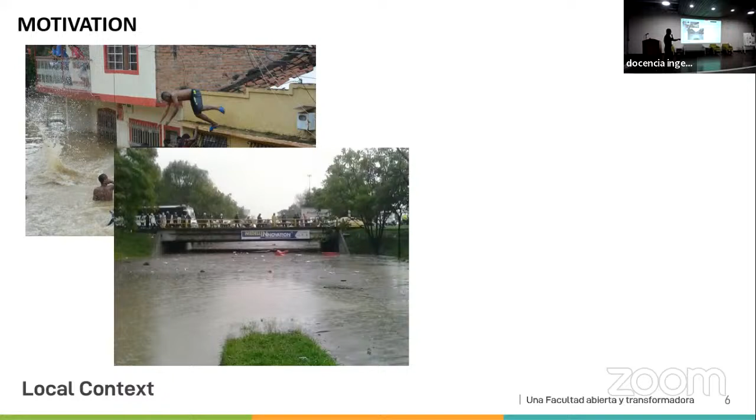This is called Medellin innovation. So the city that we call the most innovative city in the country is getting flooded every time we face a not that extreme rainfall. This is Bogota, our capital. This is Barranquilla, that is very famous for this kind of, we call it arroyos, like urban streams. They appear in a matter of minutes. They have been causing deaths and damaged property. And we see this every rainy season.

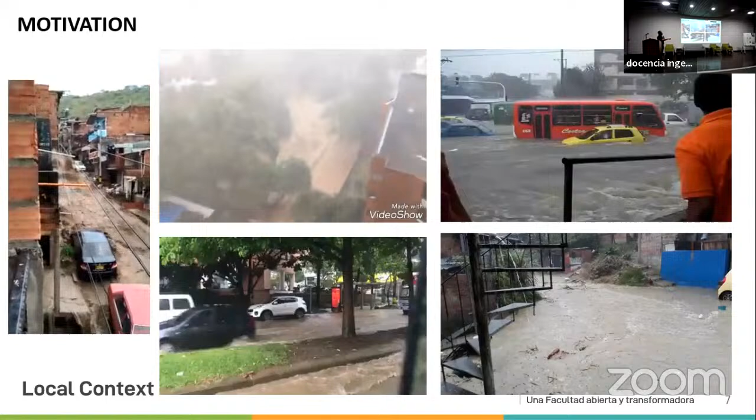But this water that is flowing from the upper part of the mountains gets into the flat parts, causing this kind of problems.

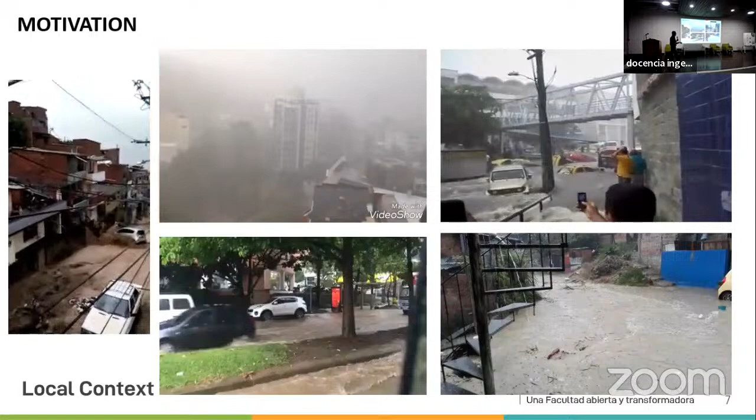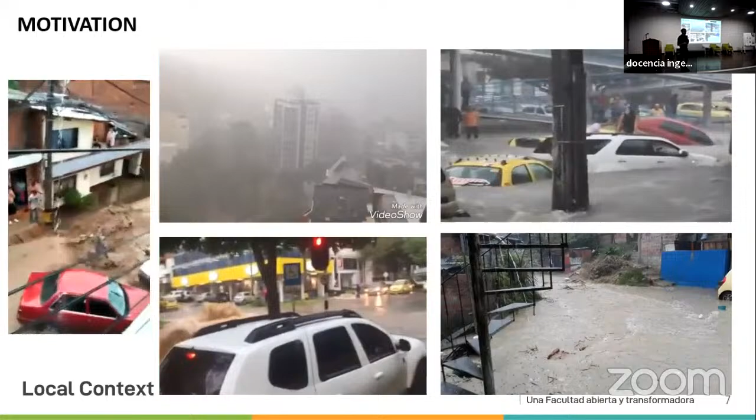And this is a combination of what we are building on top of our cities, but also a lack of capacity of the underground system that we have built. So we can see here on the manholes, the water overflowing. And this happens every time it rains. And again, I repeat, not a very extreme rainfall.

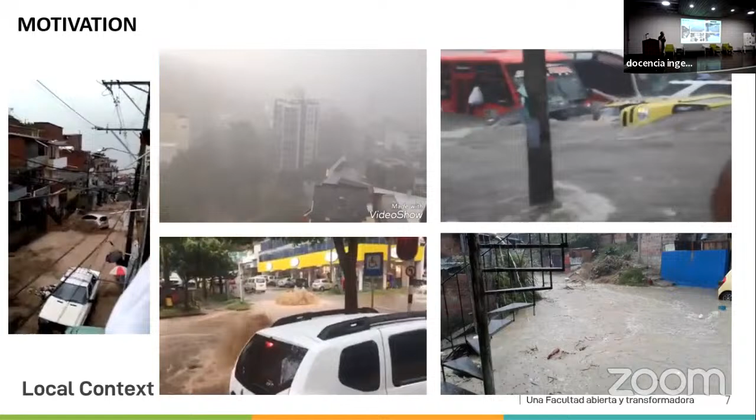This particular case, in this part, there is an underground stream. So it's not even a sewer system. And we cover it completely. And it dates back 50, 60 years. So the lack of urban planning is also exacerbating the urban flood problem. And I want to finish this motivation with this video.

And in this particular one, I want to show you another problem that we face in Colombia and developing countries that maybe you don't face in Germany: where we are building our houses. So we are not planning the territory. So I will wait a little bit. You see the house is completely flooded. You see what is the problem? Too much rain. You may think that, but in this particular case, there is an extra problem.

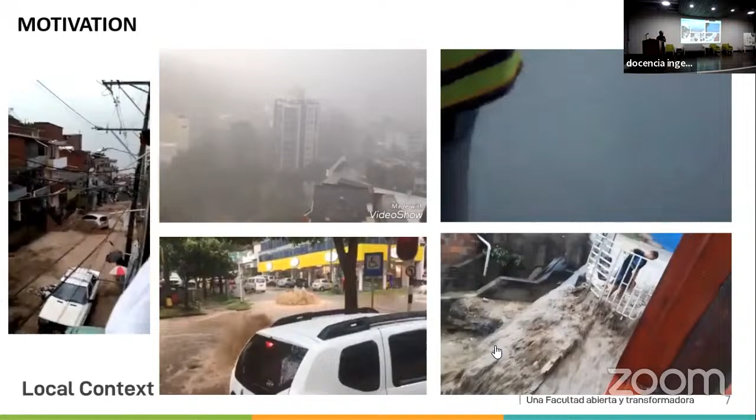We are building our houses next to the river. So we are not building with enough space from the stream. Again, this is a combination of several problems: more rainfall, poor planning. So my question here to you, and I don't have the answer, by the way, to all these questions that we are going to show you here.

Do you think these floods or disasters are happening more and more? Why? And we can start thinking, maybe it's because we have more social media or news coverage. We are more exposed to what is happening. Was this happening before, but we were not aware of it? Maybe. Is it the urban expansion, planified or not properly planified?

I think maybe. The more we build the urban spaces, the more impermeable surfaces we have. The more impermeable, more surface runoff. So where is that water going? To the streets and to the sewers. And if the sewers don't have the capacity of the streams, then we see more and more floods.

Is it climate change? It's one of the topics of the seminar, right? I don't know if you believe in it. I do believe in climate change, and we are living it. The rainfalls are becoming more extreme and more frequent. Places that were not flooded before are getting flooded now. So the distribution of masses of energy and water is changing.

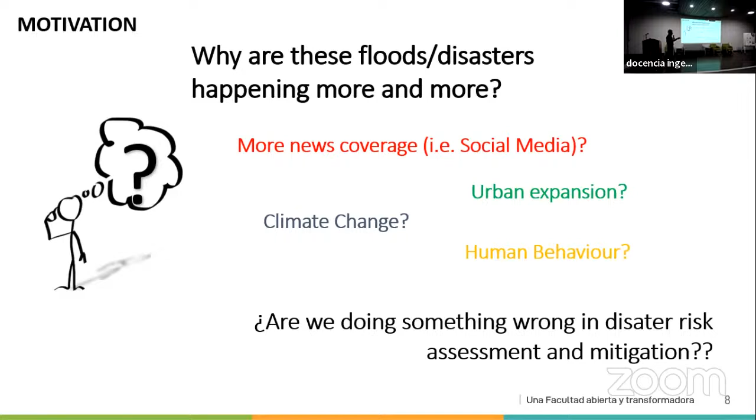Is it human behavior? We build where we are not supposed to build. Maybe we are taking actions in the wrong direction. Or maybe we are doing something wrong in the disaster risk assessment or the strategies we have to deal with this new paradigm. So based on these questions, I will show you why we are working on this topic.

And why in urban areas? As you may know, in 2020, more than half of the world population is now living in urban areas. So maybe the flooding is the same, but we have more people exposed. So that's why I choose to work in urban areas, because when we work with floods, we can also work in large scale flooding. But I think if we work in urban areas, we have a bigger impact in terms of the number of people we are helping. Maybe, I don't know, naive.

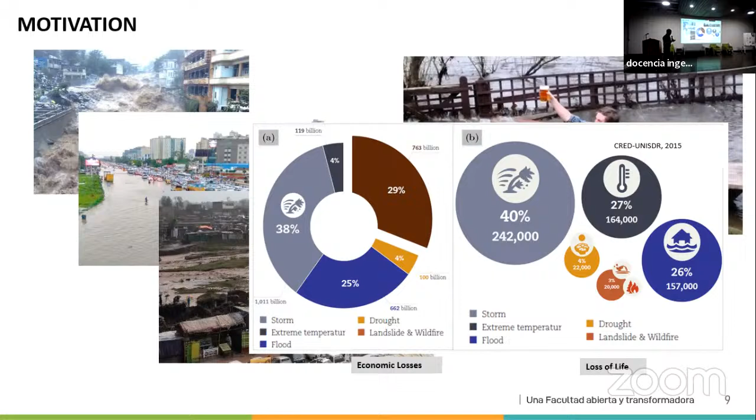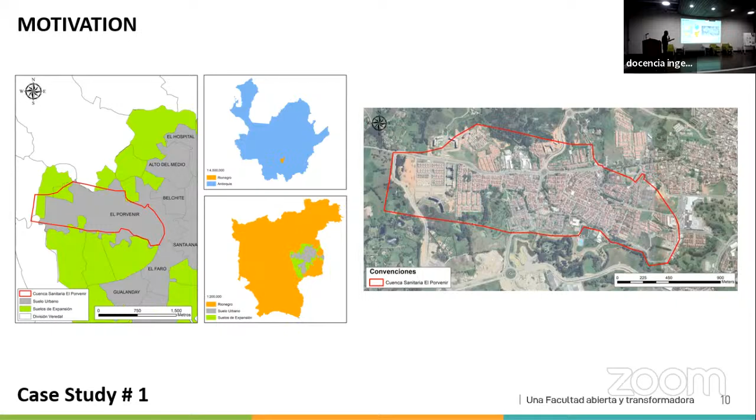And this part of Antioquia has been developing exponentially over the last two to three decades. So, first of all, flooding every time. When you see the news, you can see that that part of the city and others are getting flooded in every single rain, dating back from 2011, and in 2021, 10 years later, the same problems, or worse. So we are not doing anything to prevent this from happening.

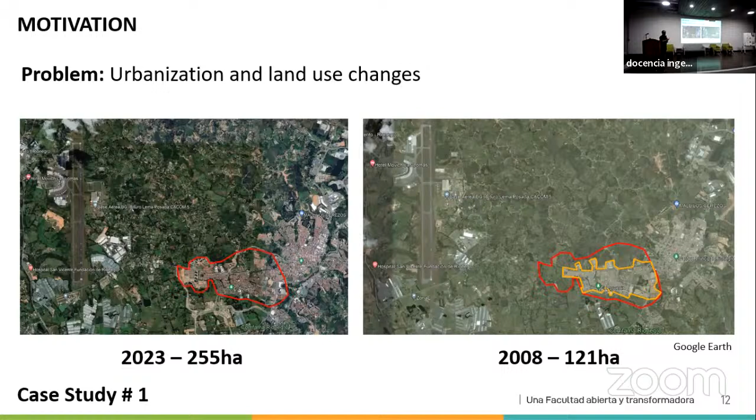So imagine you grow this big, but you don't build infrastructure to cover that extra water coming from more surface runoff. That only exacerbates the problem, and that's why we are still seeing floods. Plus, climate change, so it's raining more frequently and more intensely. So this is one of the things we need to cover right now when we talk about urban drainage and floods. What is going to happen?

So we need to plan the cities of the future accounting for what is going to happen to the climate, even though it's uncertain. If we don't plan accounting for climate change, any solution that we build will not be enough.

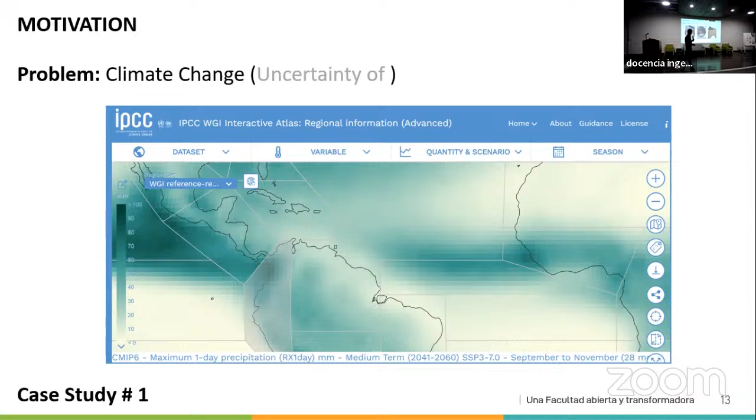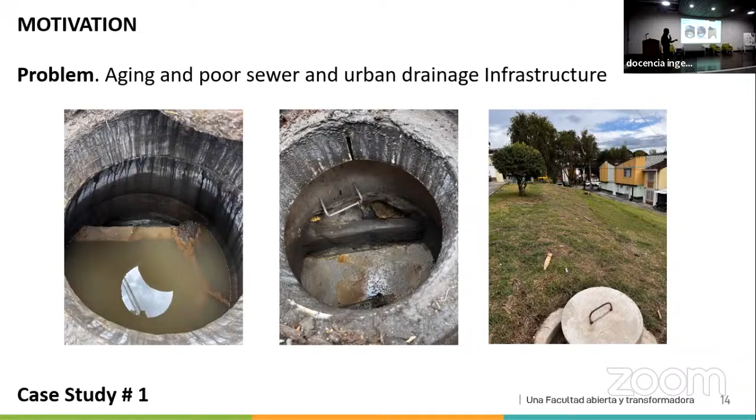And when we did the field survey, we found things like this. In normal operation, this is only sewer water. It's not raining at the moment. It's already collapsed because it was built 50 years ago. So what to do with these kinds of problems? If we put together urbanization and land use land cover changes, plus climate change, plus that aging infrastructure, we are only going to see and face more and more flooding. Based on that, we asked ourselves, okay, what to do?

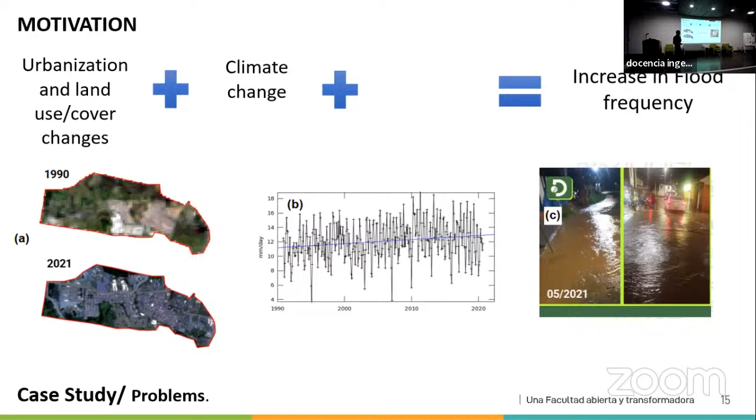This is the kind of flooding we are dealing with there. These images and videos are from around this part of the city. This is a very flat area, high water table, poor infiltration, poor sewer systems. That's the video of the flooded area.

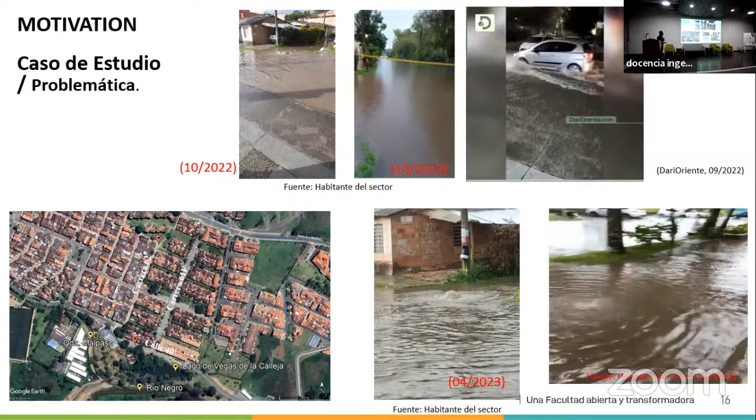So we wanted to propose how to reduce that flooding problem, but not in the conventional way, not just putting bigger and bigger pipes. We wanted to evaluate if nature-based solutions in the form of sustainable urban drainage systems can work in mitigating the impact of this flooding.

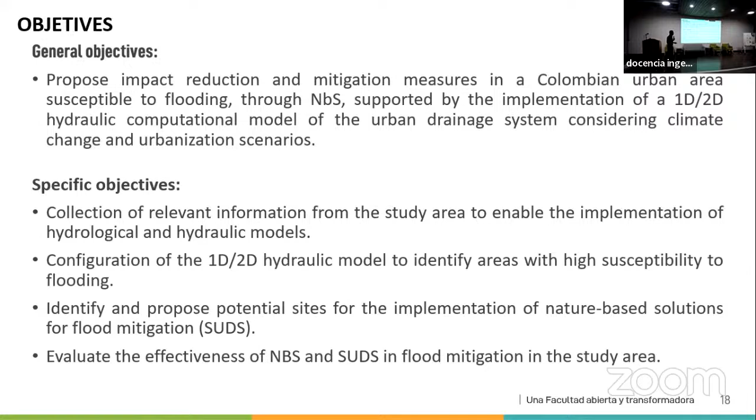Basically, what we did is build the hydraulic model: a 1D model in pipes and canals and a 2D model of what happens with the water when it goes onto the streets. Then we tested some potential sites to locate these sustainable urban drainage systems, and we checked whether we can reduce the flooding problem in the area. So basically, I'm okay with the time.

This is how our network looks. Another problem here is that our sewer system is most likely combined. So the same pipe is used to transport sewer water but also rainwater. So think what happens when that water goes to the streets and we see these guys swimming in that water.

And we found that in Rionegro. And not only there, everywhere we go in Colombia, we have that problem. I don't know how it is in Germany, but here that is a really, really big issue. We have to manage to get a really high resolution digital elevation model. This is really important to take proper decisions.

Imagine when the water goes to the streets and you cannot represent it very properly with the surface. So you don't know where the water is going to go if you don't have a really detailed one. In Colombia, this is not an easy thing to have. It's very expensive and not everybody is willing to pay for that.

Fortunately, we have the utility company there, which is also the one that works in Medellin, that has a very detailed one. It was 75 centimeters by 75 centimeters. So we properly managed to represent the streets. That is what channels the water that is flowing on the surface.

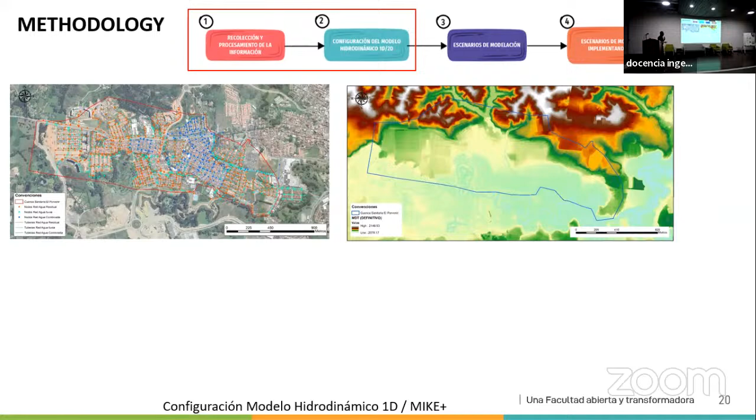We also did a classification of land use. This is how the municipality looks in a raster format with 7 classes. You see the roads, you see the buildings, you see the trees, grass. With this, we wanted to know how impermeable the surface was, to evaluate the potential of how much water of the rain will become runoff.

We did this with 3 satellite images from Google. That's the way that we need to do it, because the satellite images here are very expensive. So we try to lower the cost, and we managed to get a really decent approximation of the urban surface.

This work was expanded later, and I'm not showing it to you today, but we also managed to build a simulation model based on cellular automata to project how the city will look in 25 years. So we did a simulation. It's a software called Dinâmica EGO from Brazil.

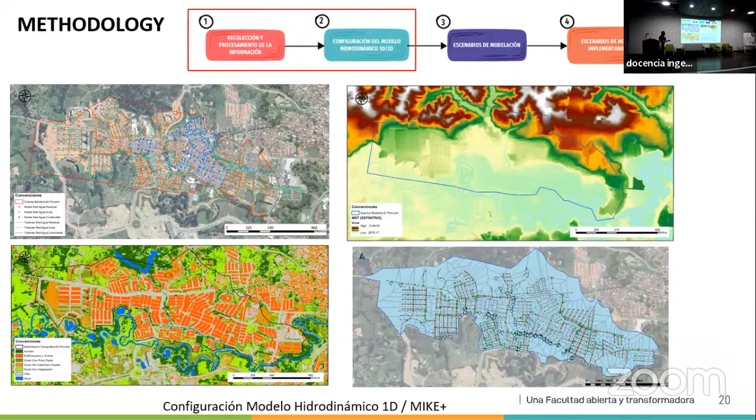And with 2 or 3 images that we get from Google Earth, we managed to simulate how the city will expand in 25 years. And if you know how the city will look in 25 years, maybe you can plan the infrastructure for that future. And then we built the models, 1D, 2D. This is how the 2D model looks. You see a lot of triangles. These are the kind of results we have.

And then we tested our models. Locally, when we were walking the study area, we found some videos of previous floods. So people showed us where the water elevation was, because unfortunately, we don't have many measurements in our systems. So if you want to know if these models are working properly, you need measurements.

Okay, my model says the water in this place will be 20 centimeters. But if I don't have enough information to prove it, to calibrate my model, I just have a very beautiful model, but I don't know if it's giving me the right answer or not. So the way that we calibrated was with these videos that we collected from the people. I remember those videos that were there.

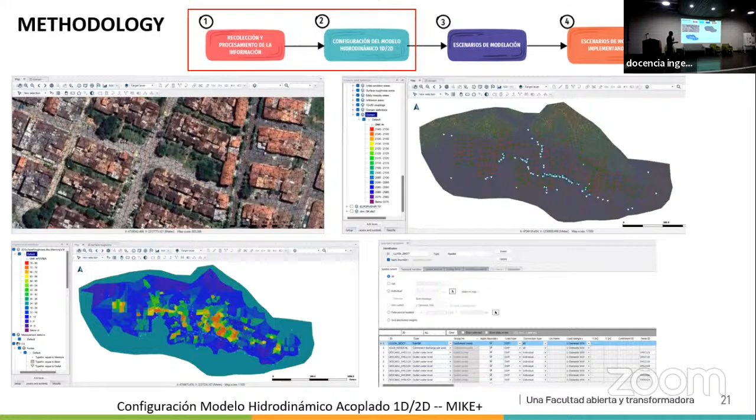So we walked the streets and we managed to ask people to tell us how deep the water was in a specific place. So the calibration that we did with our models was testing that our model gives us the right kind of elevation at certain points that we measured. So we were very confident that our model was simulating the rainfall-runoff part of the event.

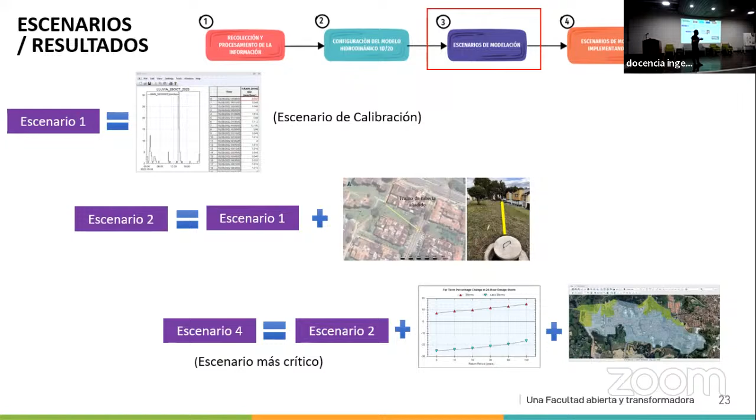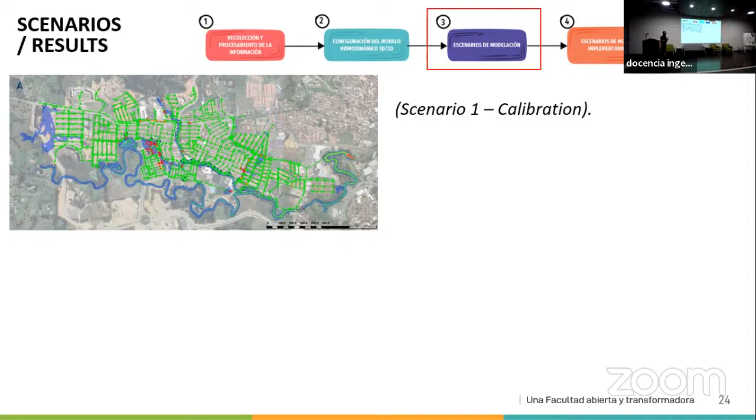And then we started testing for climate change. Okay, what happens if the rain is not this one, but 20% more, coming from climate change? And this is the kind of results we have. You can see here, if you see it in red, these are manholes that are overflowing. This is for the actual simulation, and this is for the future one with climate change.

You start seeing a more critical situation. You can see more flooding in this upper part. You can see that here that part is not flooded. So climate change is having an impact on our simulations. This is how the study area looks now. This is how it looks in the future. And you see that the water is almost double in both scenarios.

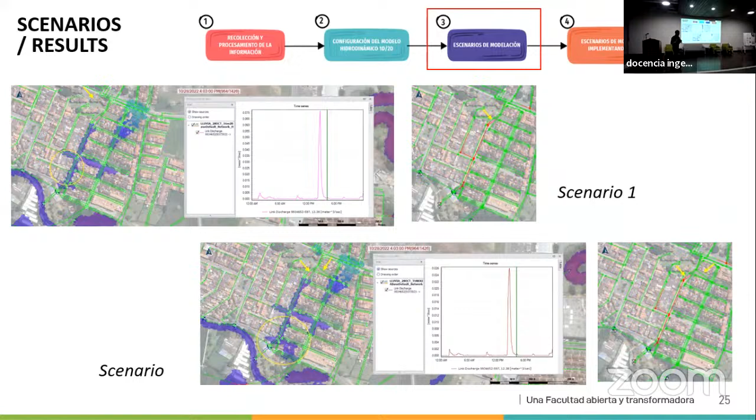So what to do with more water? We put bigger pipes? Maybe. That can be a solution. But we ask ourselves, is that sustainable in time? So we are going to start getting bigger and bigger and bigger. That needs to stop. For instance, I will use the case I know a lot, the Netherlands, the dikes. So they said, okay, let's go bigger, bigger. And at one point in time, they said, this cannot be sustainable. Let's build with nature. And that's where sustainable urban drainage comes around.

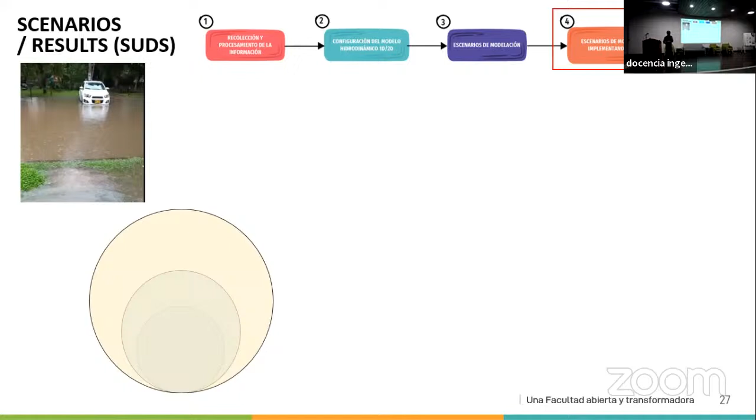So this is the question I'm asking. Shall we put in a bigger pipe? And if more water comes, a bigger one? Maybe they will take the whole street. Is that economically feasible? I think it's not. Or dikes, shall we increase the dike if the water is going up?

And if the water continues going up, shall we build a bigger dike? And in that area, we have dikes, by the way. There is a Rionegro River that is there. This is the image that is there.

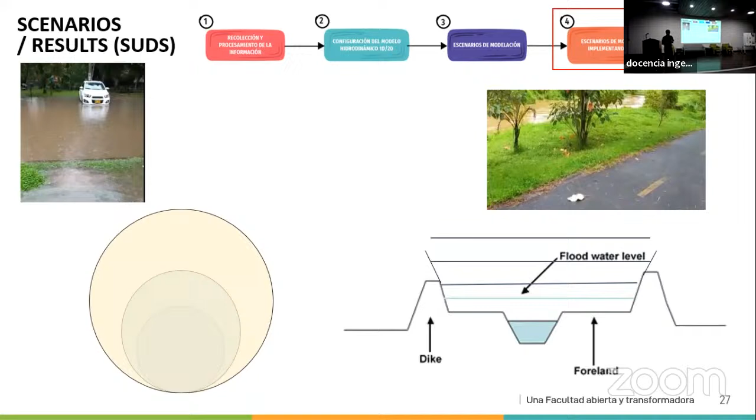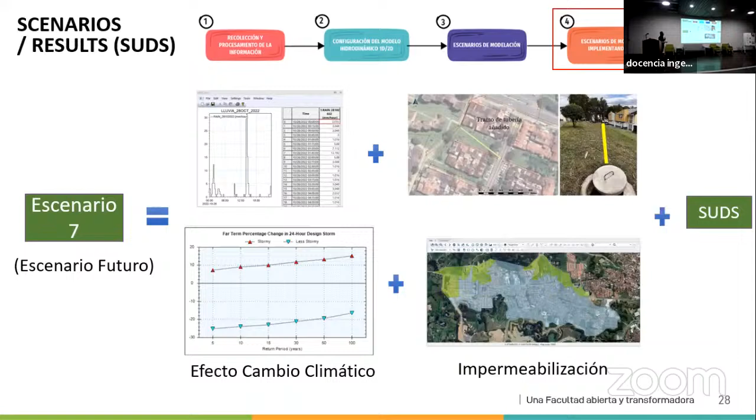So the answer worldwide is no, stop. Let's start building with nature. And that's what we want to test here. We want to take the future scenario, what happens with climate change, blah, blah, blah, but including sustainable urban drainage systems. So what we did is that we tested this kind of solutions.

We tested different approximations, different parts, and we tested in the upper part because the model, if you remember the previous slides, was showing that the water was showing here. So this, I think I didn't do that correctly in the DTM. This part of the city is flat and then goes up. And that upper part is the one that is now getting constructed.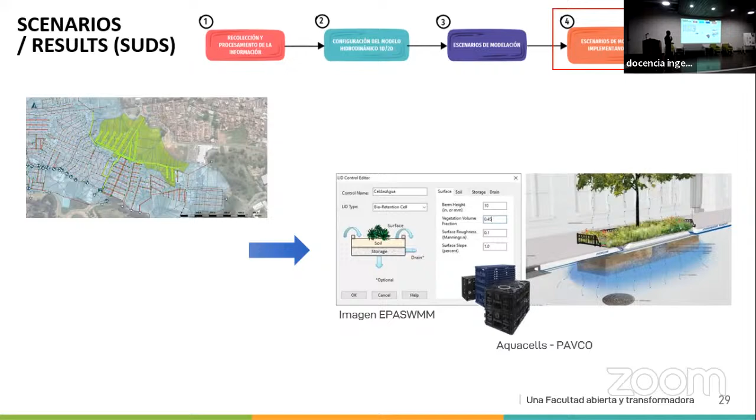Very huge building towers. So they are changing the upper part that is permeable to very impermeable parts. And that's what is getting a lot of water. So we started testing, okay, what happens if we put this kind of solution in this upper part? And this is the kind of results we are having. So this is the scenario without SuDS, and this is the scenario with SuDS.

You can see many more red here, indicating flooding manholes, but this is better to see in 2D. So this is the peak flood. We are getting a reduction of 27% with this kind of typologies that we tested in this case study. This is how the system looks. We managed to control the flood in this area. That was our main objective.

Not all, as you can see, this part continues to be flooding. So we need to put more of this type of solutions. But as you can see, not all the flooding was managed to be reduced or avoided. So that also leads us to some kind of conclusion that I will show you later. Okay.

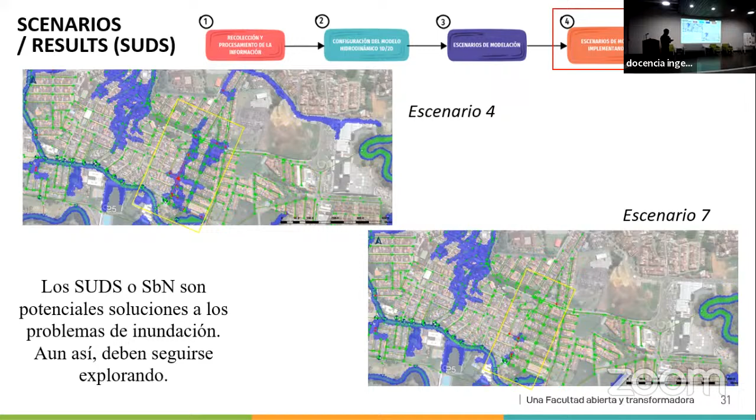I will stop this case study for a while, and I will show you very briefly two other case studies. So this is very famous in Colombia too. This is here in Medellin. It's a river system that is called La Picacha, and it is famous for the flooding on the underground roads that cross the city. So this is the kind of problems. These kind of underground systems get flooded every time it rains.

Unfortunately, some people have died there. They get trapped in the car, they cannot go out. And it was less than a year ago, we had 2 deaths there. I always joke about this with my Colombian students. I say, we normalize death here in Colombia. I'm sorry to say that. So 2 people dead maybe is not that critical in the Colombian context, but I know that even 1 life matters. We need to take actions.

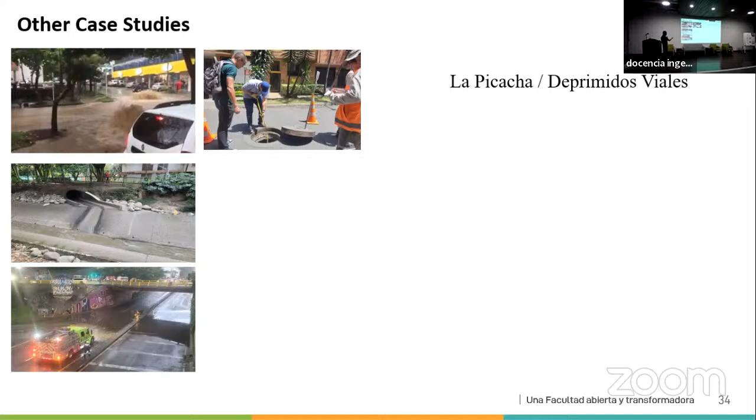Then we investigated their network because nobody knows where their system is. So we need to do a lot of work there. So this is the kind of problems we are facing. We found something very interesting that few people knew because these are very old systems. And in this video that I showed you at the beginning with the overflowing manholes, there is this stream. So we covered a complete river system in the city, and nobody knows they live next to a river that has a road on top.

And on top of that, this is a university that is called UPB. That stream goes next to it, and naturally it flows through the university. But when they built the university, they deviated it, giving an angle of 180 to that stream. So imagine you are water, you are going straight, and then you need to go the other way around. What happens with you? You back up water. And that's why we see these kind of things here.

So poor urban planning. Somebody said it's better to have a university, let's take out the stream. So let's stop a little bit and think about how all the decisions that we make in urban planning will affect you later. So this was a really poor decision back in the 50s.

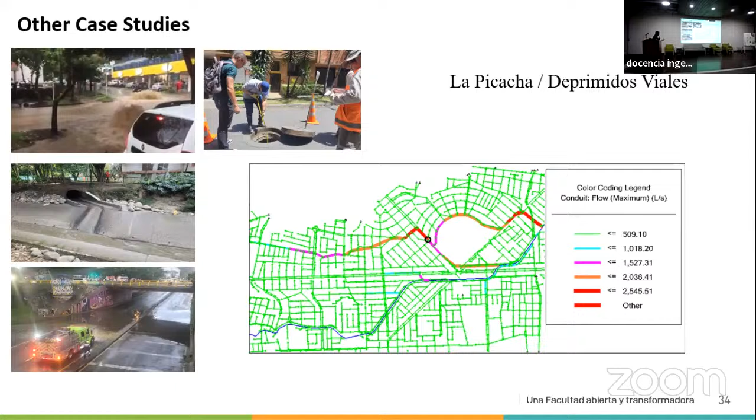Then we build a land use map. Then you see what is permeable, what is impermeable. And then we build a 2D model. And this is one message that I want to give you: if you want to understand urban flooding, you need to do 2D modeling. You need to know where the water is going to go in the streets, and that is only possible if you do the 2D model on the surface.

And that's very computationally demanding. It's not an easy task, but it's needed. This is the type of problems we have there. This is their network. This is in 1D, 2D. And if you see this type of results in your model, that means that you are getting water on the street.

So we wanted to test, okay, this is the flooding, it is happening here. Can we apply the same principle? Can we put some SUDS there? The answer was, let's try it. And we are getting a reduction, not that big. I will go back to this conclusion later. It does something you cannot deny, but it's not enough if we want to prevent flooding. And I will go back later to that.

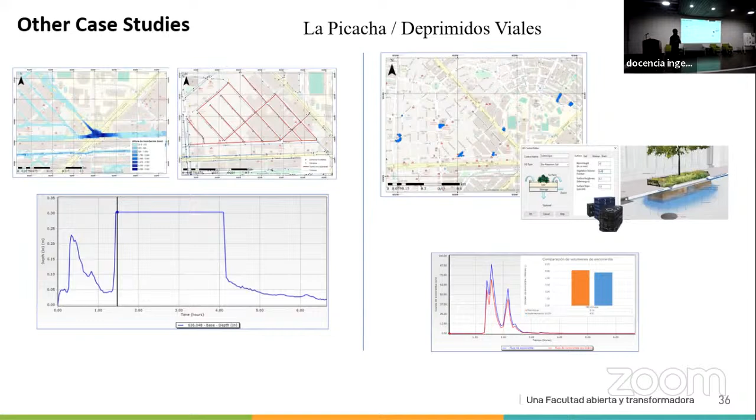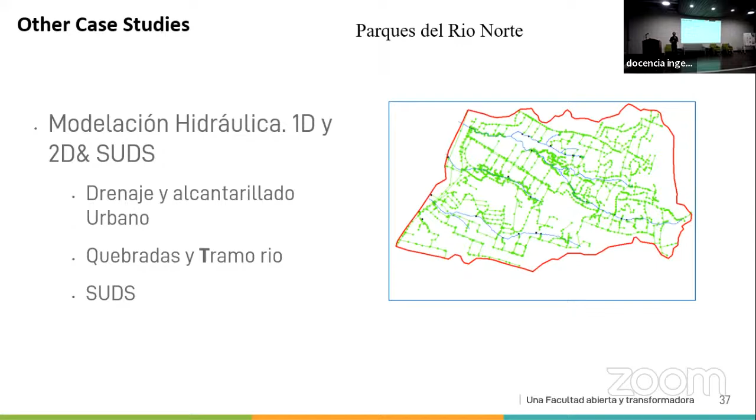And yesterday, I know that you were being told about the project called Parques del Río Norte, right? I was working on that project too, but I was in charge of the hydraulic part. I'm sorry, I didn't translate those. It says hydraulic modeling, 1D, 2D, urban drainage, river, streams and sustainable urban drainage. And what we did here, it was the same. We modeled 1D, 2D of the system.

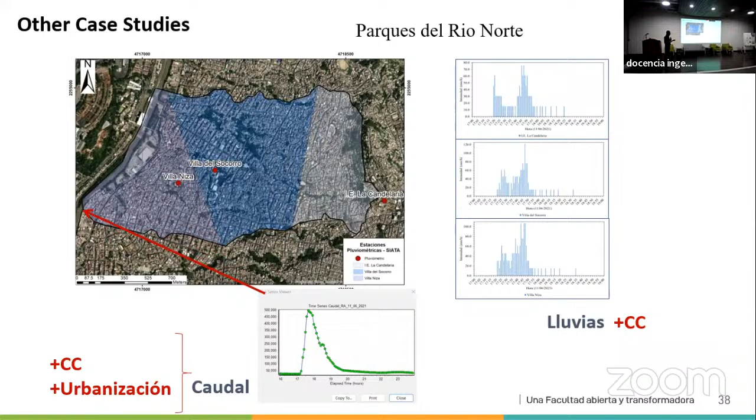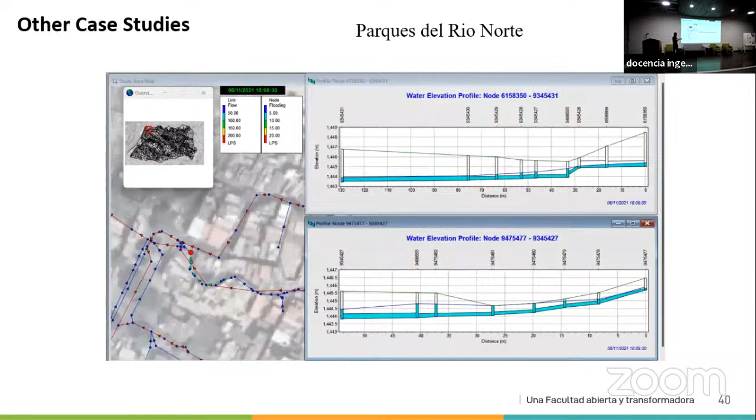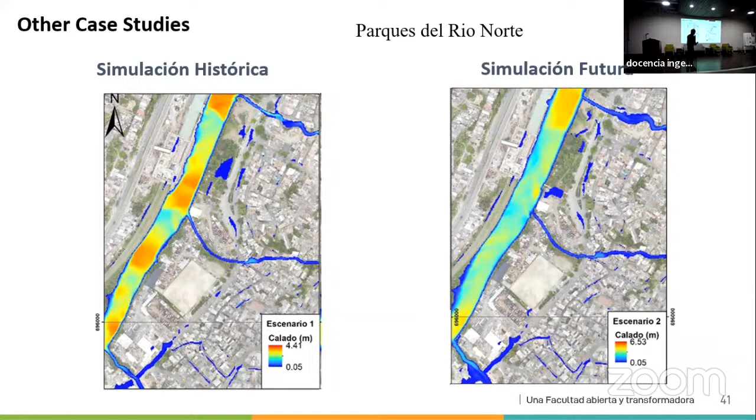So you can see here how the system is overflowing. This is the profile of these kind of networks. This is how it looks in 2D. In 2D, we managed to see how much water will stay on the surface for a case study, actual and future. This includes climate change and urban expansion. And if you see, there are some flood parts that remain on the case study. So what to do with that water? Shall we put it in a pipe and throw it to the river or the streams? Maybe. But again, we wanted to test if we can put that water.

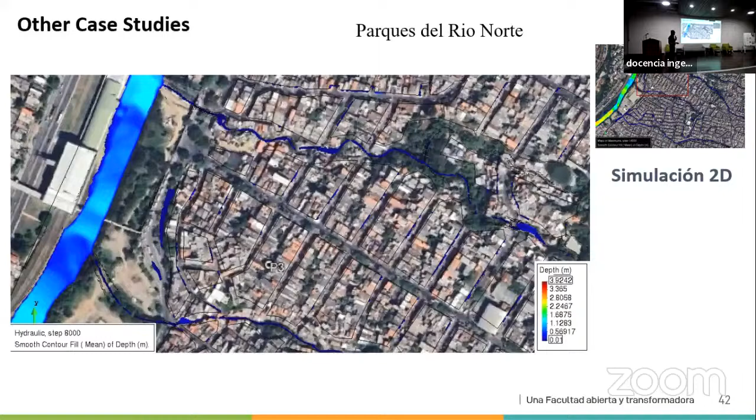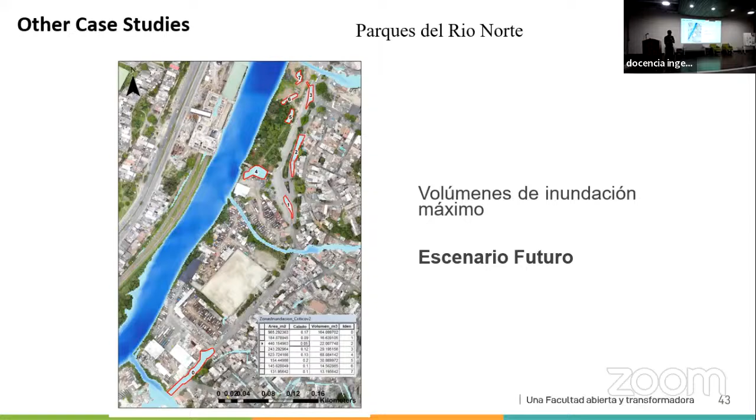So this is the same simulation in 2D. You will see the water going to the streets and getting accumulated in the lower part. So it is very steep in the upper part, and then coming back to the river is very flat. And in the end, we get this flooding extension. So we managed to account for how much water we have in excess. So this is the water that we wanted to see: can we put it in a sustainable urban drainage system? And the answer was yes.

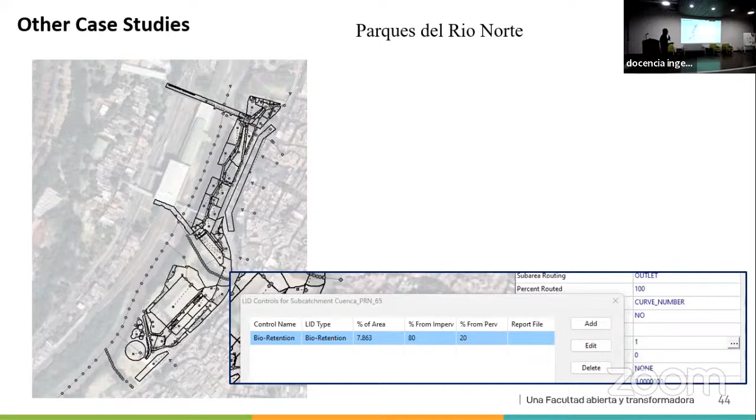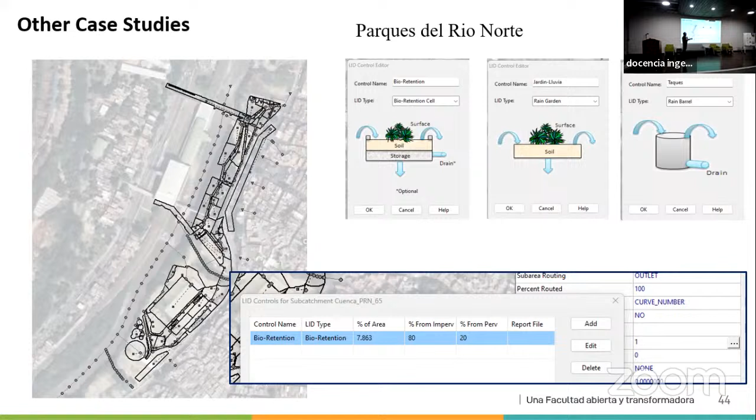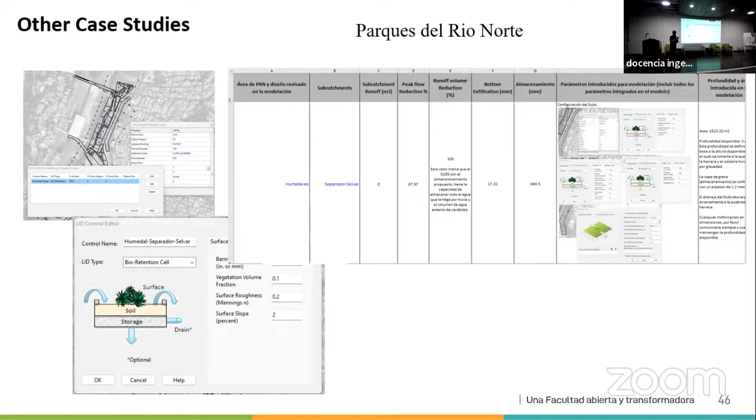So we built a model of the park. This is how the Parques del Rio Norte looks like in a model. And we put there some of these solutions. So we tested bioretention cells, rain gardens, rain barrels. What to do with that water? We put some of them in the areas to collect them. And we tested different alternatives. And finally, this is the kind of product we developed. So for each one of the catchments, we said which solution is needed and what are the technical specifications of that solution to mitigate that excess water that we are seeing from our models.

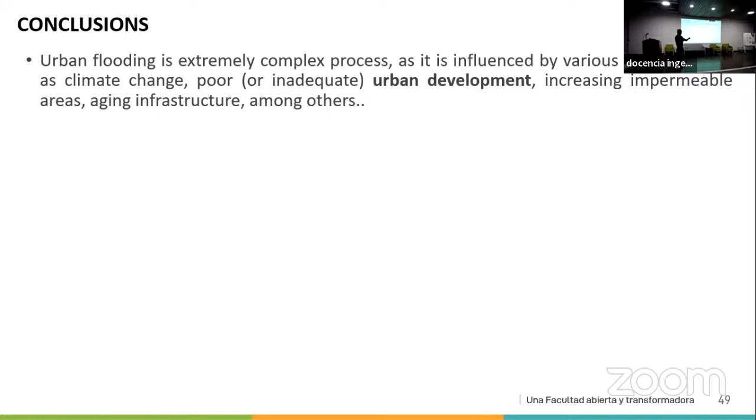Finally, some conclusions. The problems that we are facing in flooding come from several sources. Climate change, you cannot deny it. Urban expansion, you have to plan for it. Aging infrastructure, and many more. You can say that this invites us to new ways of thinking. Worldwide, there is a shift in the paradigm. In Colombia, we are still thinking that the solution is the pipe, is the dike. We need to change that, and you, young people, are the ones that need to start doing that change.

Let's start putting SUDS, nature-based solutions, into our cities. Let's build more green, is the final message there. We need to build models to take decisions. You need to know how much water you have and where.

So we need to see where the water is coming from, not where it is showing. These kinds of models allow you to take decisions where it's happening. For instance, in the first case study, we see that the flooding is coming because we are building impermeable surfaces on top, but the flooding is happening in the bottom part of the catchment. So what we do upstream will affect what's happening below.

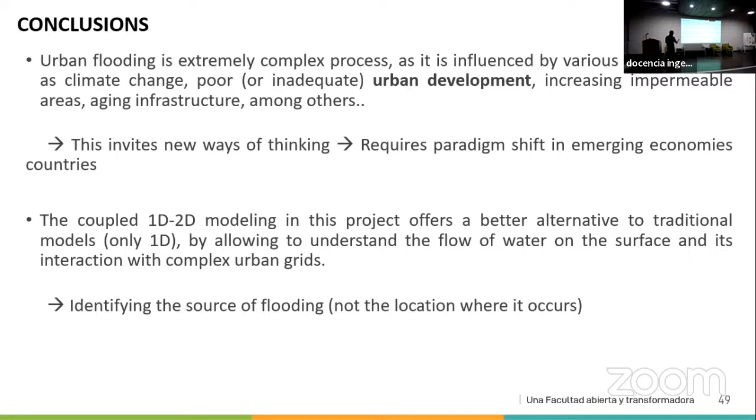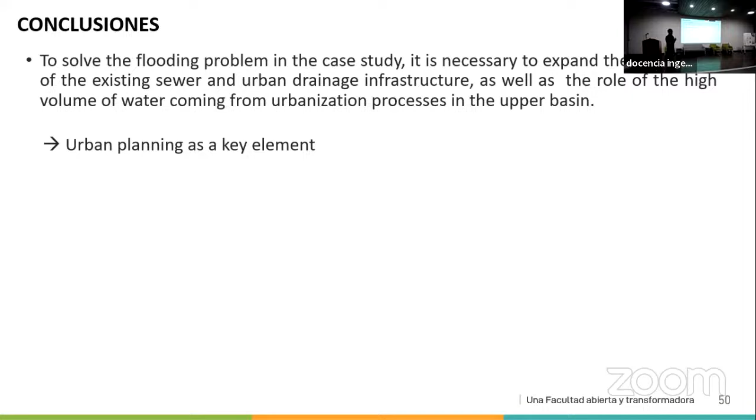Okay, to solve this problem, we need to start changing the infrastructure and taking care of the upper part of the stream. Urban planning, key element. So you guys, Ingeniería Urbana, yes, you play a really vital role in our society today, and there is a lot of work there to do. We need to start incorporating nature-based solutions, sustainable urban drainage systems.

But one key message here: SuDS are not enough. No matter how much green you put on a surface that is already built, you cannot decrease the surface runoff to the initial levels. So you need to do a really smart combination of green infrastructure, SuDS, with gray infrastructure.

So you also need to account for what is the normal way of dealing with floods. That's rivers, that's dikes, that's pipes. The good combination of the two is the one that is going to really solve the problem of flooding in our cities. But let's start thinking green, please.

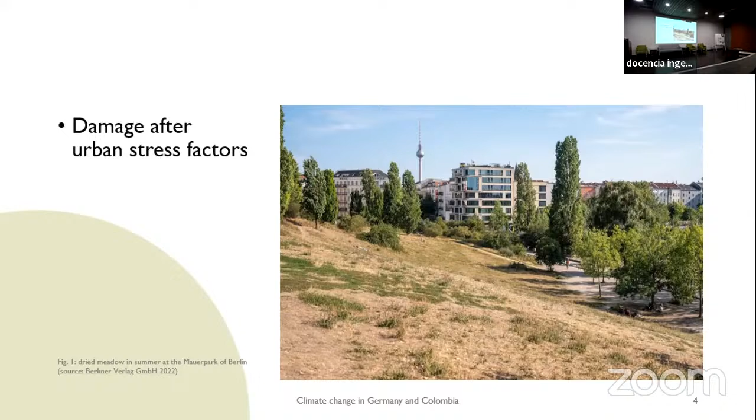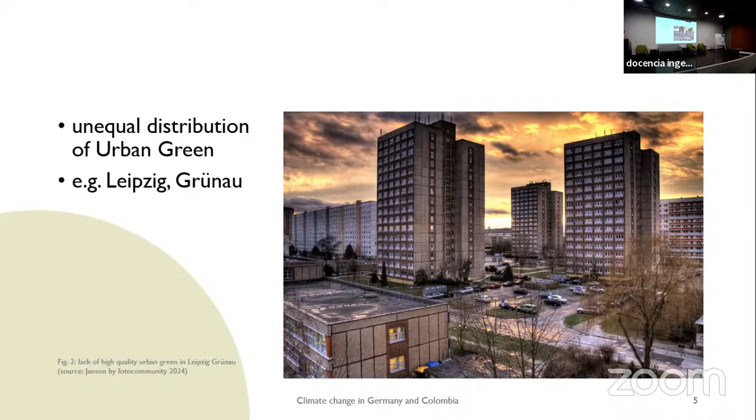The last thing I want to mention is the Leipzig Charter. This is a guiding document of urban planning in Europe from 2020. And urban green is one of the three important dimensions of the city in this guiding planning document, and is seen as the basis of a healthy living environment. Accordingly, it is essential to preserve urban green spaces and adapt them to current challenges.

Yeah, next, some facts, figures, and data. So this part in the presentation will show key numbers and facts about the green space in German cities. At first, green spaces offer many ecological benefits. The first one is air quality improvement. So plants take in carbon dioxide and release oxygen. The second one is temperature regulation. So plants evaporate water, which cools the air, which is called evaporative cooling. And the third one is the wildlife habitat. So green spaces provide homes for various animal species, increasing biodiversity in the city.

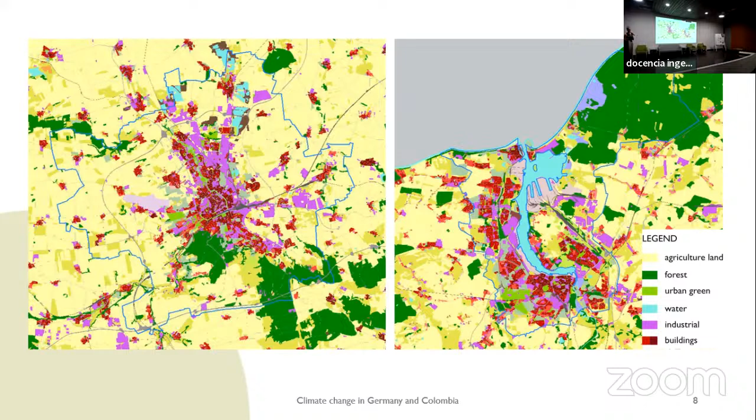A 2016 analysis based on Landsat satellite data shows that German cities are greener than probably thought. This has positive effects on the urban climate and quality of life. So the list includes recreational areas, green roofs, private gardens, city trees, and green courtyards.

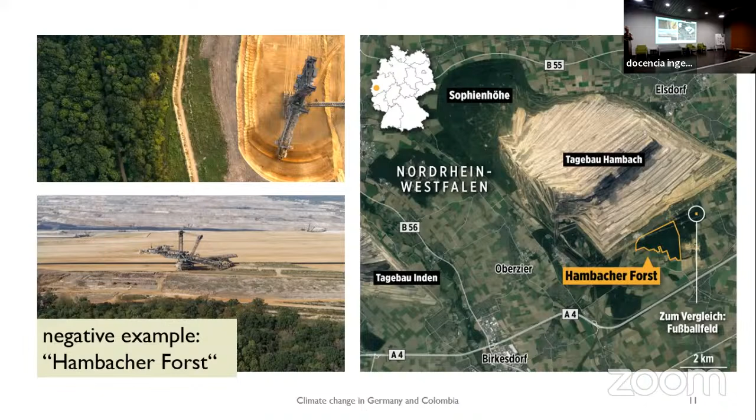Yeah, then let's start with some strategies. Exactly. I want to present 4 relevant strategies that can be adopted to combat all these different problems. At first, I've chosen the example of expanding the area of green spaces. To the same, existing green spaces must be preserved and brownfields revitalized or converted. At the same time, effective watering systems should be installed so that the greenery has better local conditions. Furthermore, new sealing should be kept to a minimum in line with the 30-hectare goal.

To give you another example, this is Hamburg, a World War II building. And since July of this year, this whole building has greenery on top and is even accessible by foot. So that's not only an attraction for tourists, but also a new urban green space for the neighborhood.

Another example is guerrilla gardening. You can see here a typical street in German neighborhoods where people put some seeds next to the trees, so it's more than only a meadow between the trees. Guerrilla gardening developed out of political protests and takes place in public spaces, mainly in large cities or on public green spaces. But in the meantime, the protest has more evolved into urban gardening.

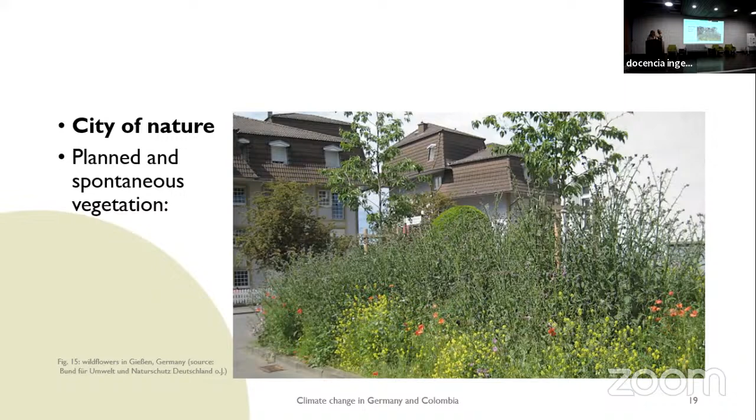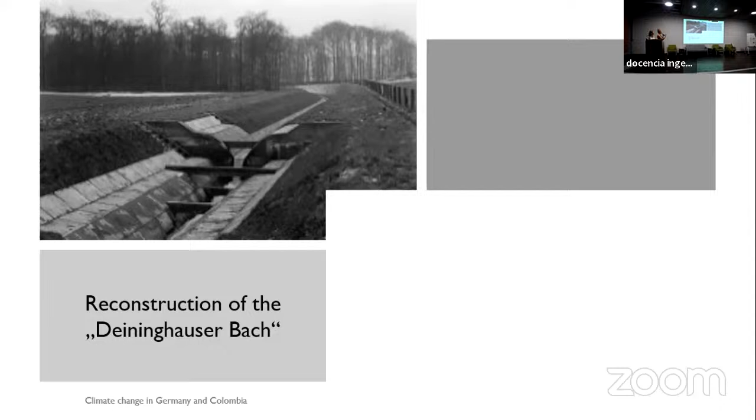The planning and implementation followed several key principles. The first one is the renaturation of the Emscher. The Emscher was a long, open sewer. As part of the project, a comprehensive renaturation program was started to restore the river. This includes creating new river landscapes and wetlands. You can also see it in this figure. This is the Deininghauser Bach before, and you can see it after the project. So it's also a renaturation, not of the Emscher, but of the Deininghauser Bach.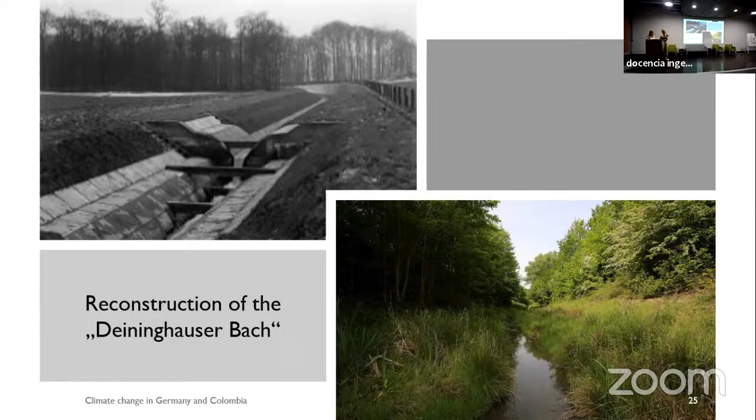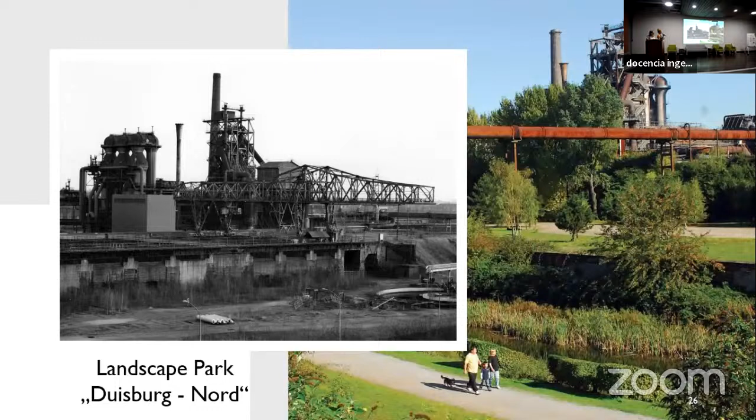The second one is the integration of industrial culture. Former industrial sites were not demolished, but integrated into the landscapes. Examples include the Duisburg Nord Landscape Park and the Nordstern Park in Gelsenkirchen. You can see the Landscape Park Duisburg Nord before, and after the Emscher Landscape Park project. The third one is ecological networking. The park was designed to create ecological corridors to connect different green spaces. This promotes biodiversity and provides habitats for a variety of plants and animals.

And the fourth one is recreation and leisure. The Emscher Landscape Park offers numerous recreational opportunities, including cycling and hiking paths, playgrounds, sport facilities, and cultural events. This improves the quality of life for the residents. The Emscher Landscape Park has many positive impacts on the area: first, the environmental improvements, then social effects, economic benefits, and cultural significance.

So all in all, the Emscher Landscape Park is an outstanding example of how thoughtful and sustainable urban planning can improve the environment, enhance quality of life, and drive economic growth. It shows that it's possible to transform former industrial areas into green, livable, and future-oriented urban landscapes.

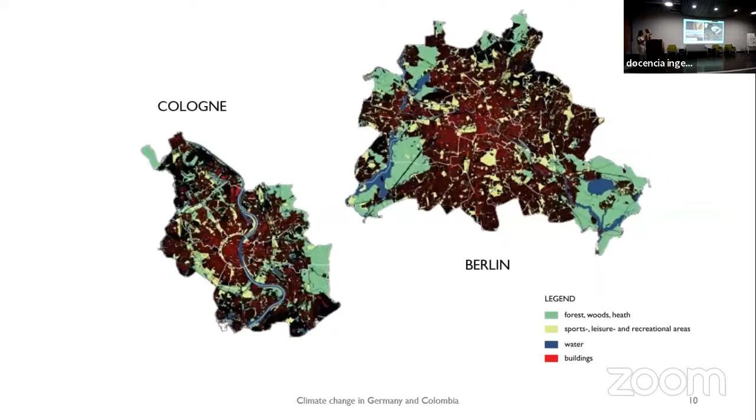Can you repeat it? I think it's about the greenery, the question about the beginning. In the strategies. Right there. In this example?

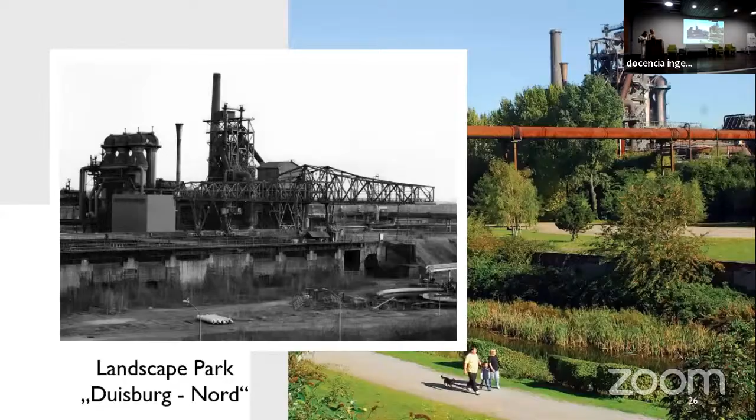Okay, back to our questions. Maybe somebody wants to answer the discussion question, or just give examples of Medellin. We are not the experts here, but what we saw already impressed us. Very shy today. Impressive presentation. Thank you so much for that.

It's really nice to see this kind of green solutions, and I think it inspires us in Colombia to start thinking of our cities like that. I have to say, to answer your question, that Medellin is one of the greenest cities in Colombia. And that comes with a big question mark, because the percentage of green in our cities is not well distributed. It is directly related to how much money you have. So the neighborhoods that have a higher income are the greener ones.

But then you go to Parque del Río Norte, and there you have only like 12% of green spaces. And we have areas of less than 4% covered by green and public spaces. You are inside the University of Antioquia, one of the greenest places in the city, but you go next to the station, and it's a park completely built in concrete. So we are not planning for a green city yet, and we need to aim for that.